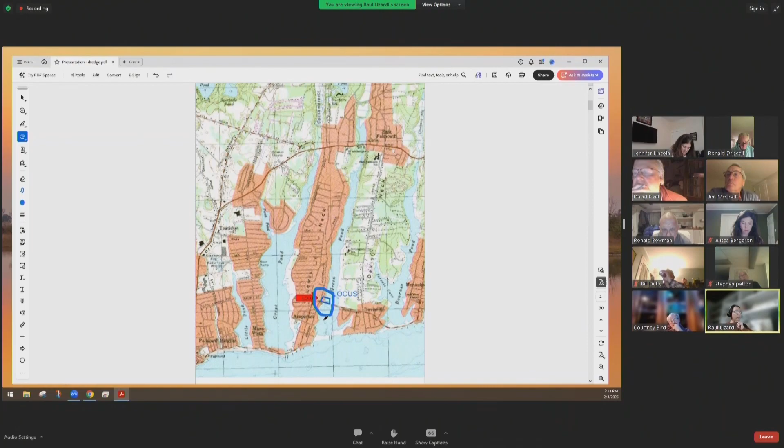I believe I skipped one of the images, but the marina eventually expanded to the configuration that is there today, which has the original line of floats and then an additional L-shape that was added sometime in the 1980s. That constitutes the current marina.

What has happened on the site is that currently there's a lot of accumulation of sediments within this area. From this point in this direction is where the Menauhant Bridge exists. So there's been a lot of accumulation of sediments in this little corner, this triangle piece. And then at low tide, the boats within this section of the marina are bottoming out and causing problems.

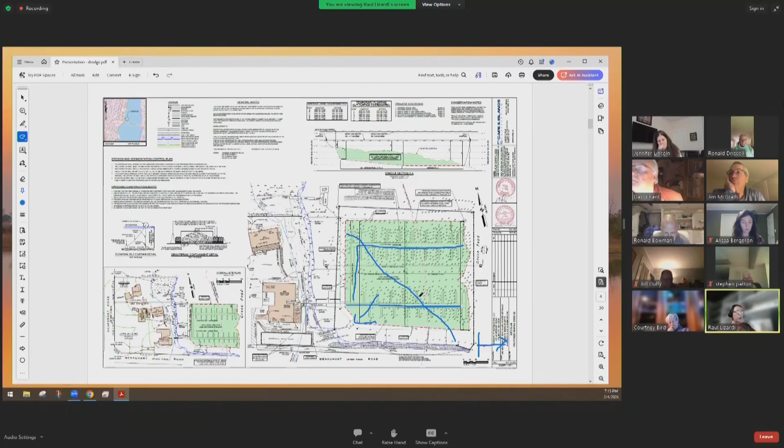The site has been under new ownership since the end of 2024. The current owners have not done any changes to this marina. What we're looking to do is get permission to dredge the site.

This section of the marina we're calling to be dredged down to elevation -4, measured from mean low water. Then this section we're proposing to dredge to -3. So there will be a transition point somewhere in the middle, between elevation 3 and elevation 4.

The intent is to get adequate water depths to use the marina properly and not cause too much problem, both for the boaters and the marina, but also for the environment. Right now, during low water levels, if anybody tries to boat out of here, there's a lot of suspension of sediments, and it's detrimental for the environment and the shoreline system at this location.

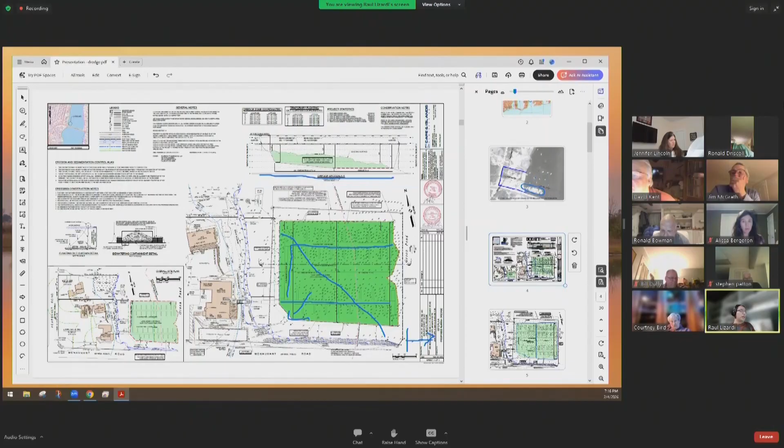On average, looking at the cross section we have on the plan—the cross section has an exaggerated vertical scale, really 10 times the design—it averages roughly 1.5 feet of dredging within this footprint. So it's not a massive dredge project, but it does cover quite an extensive area: 35,200 plus square feet.

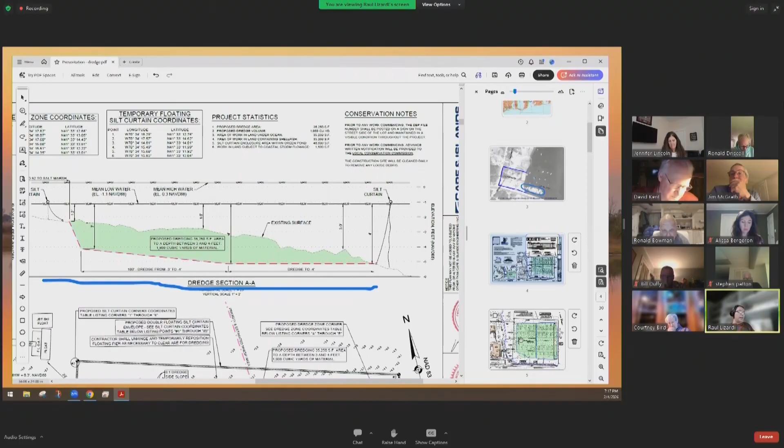The total volume of dredge material is roughly 1,900 cubic yards. The intent is to dredge the material and dewater on site. If I zoom back to my plan, there is an existing boat ramp at this location.

What we propose to do is, on the upper side of that boat ramp, install a dewatering basin. The material gets dropped into that dewatering basin. Once dewatering has happened, trucks will be delivering that material off to an off-site destination for disposal.

We believe the final disposal is going to be the Bourne transfer station. Once all of the dredging is done, all the temporary sediment controls will be removed, along with the temporary dewatering basin.

For protection during construction, what we propose is a silt curtain that completely encompasses the dredge area.

We did receive comments from DMF, and we received comments from Natural Heritage. The site, from this point towards the pond, is partially within estimated habitat. Natural Heritage's determination says that this project does not constitute a prohibited take of habitat.

The DMF letter does recommend a time of year restriction, which is typical for these dredge projects. We also received comments from the harbor master stating that this project does not result in impediments to navigation or hazards to navigation. We did also receive comments from the town's shellfish constable.

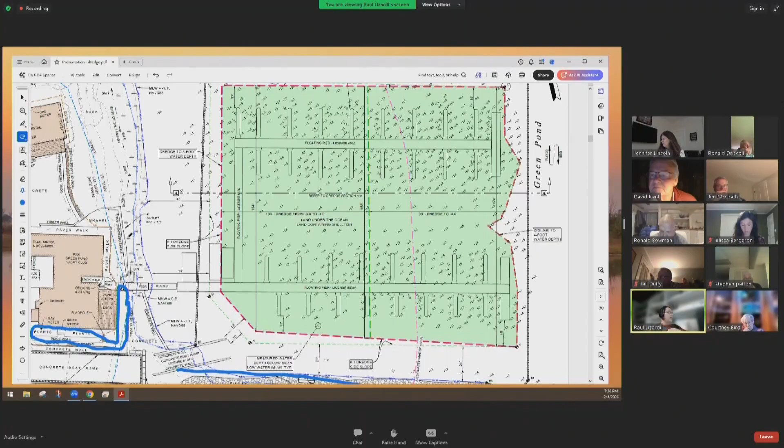There was a specific permit referenced in the comments from staff, including some past drawings or approved plans related to it. I went back to that permit, which approved mitigation in this area. Based on what I found, a compliance was issued in 2008 or 2007, and all the plans were proposed at this location, dating back to a plan I believe from 2002. There was an older plan from 2000 showing additional plantings at this location, but that wasn't the plan referenced in the order or the compliance. The only plans called out were in this location. But nevertheless, if there are plantings required for mitigation in these locations, those plantings should be there, and if not, they can be restored.

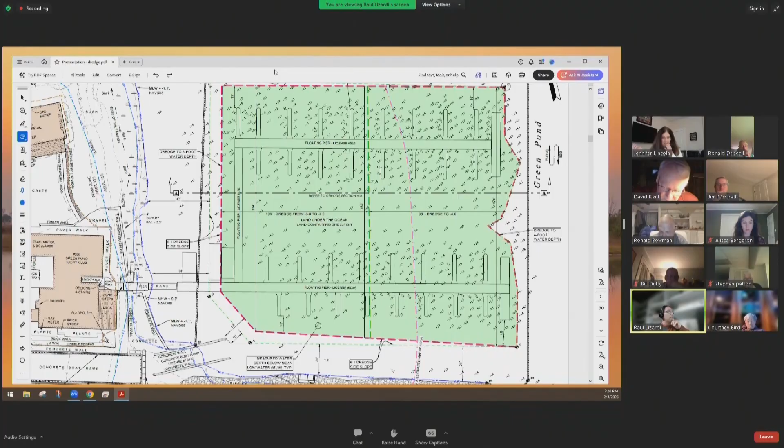Can you put your comments regarding 10.25 in writing, Raul? I know you mentioned it was in the notice, but all five were discussed in half a sentence, so if you could expand on that, that would be great. I agree with your analysis there. I need it for the record, and a little something more substantial than what was submitted. We'll condition the replanting of that bank. It does need to be done.

Alyssa, when you were talking about the terminal floats, I thought you were talking about the interior ones, not the ones Raul was mentioning. Can you clarify? It was those ones, yeah. Per the plan referenced in the license, that's what I found.

I do know there were, I think you referenced notifications, Raul. I don't know if that was at the Chapter 91 level. I couldn't find anything at the local level, but we could be missing it. So if you could send that over, that would be helpful. Maybe we can all put the pieces together.

And then, Raul, I do have a couple of questions on your dewatering now. I've been thinking about it. The dewatering area is not very large, and you're dewatering 1,900 cubic yards. How long is that going to take you?

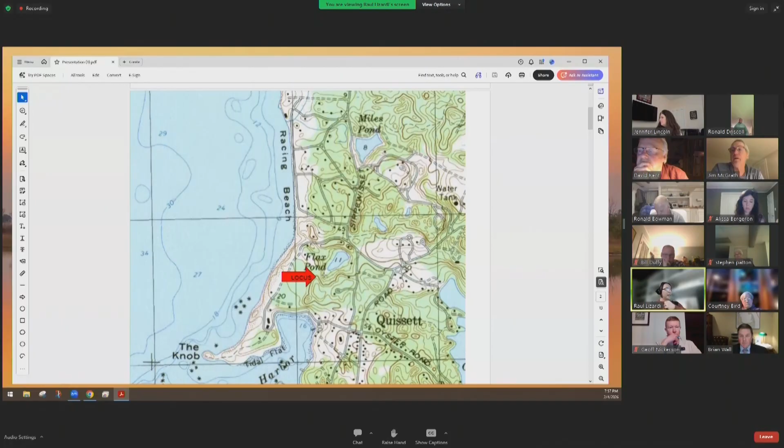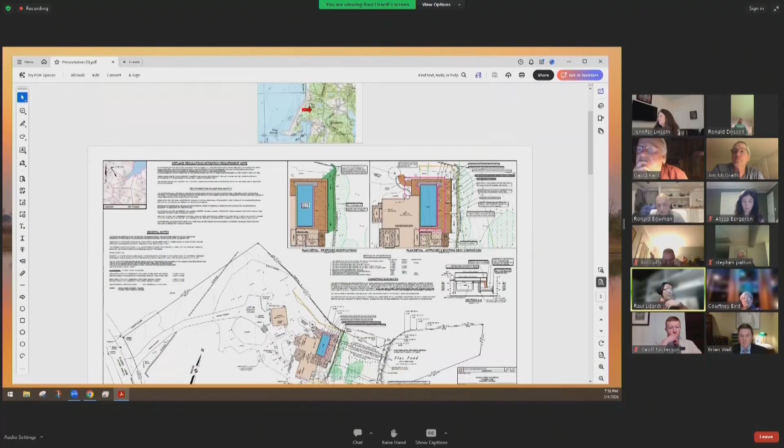The property abuts Flax Pond. There's a couple of Flax Ponds in Falmouth, so this is the little Flax Pond in Quissett. This is the application drawings that were filed with this application. This same plan was submitted last year, probably now 2 years ago, or a little more than a year ago, with the attempt of amending the active order of conditions that permitted the original project.

What we're doing with this notice of intent filing is to present the project again to this commission and present it as a project that could be approved under the regulation while still protecting the wetland resources and the buffer zone A. The wetlands, like I mentioned, there is Flax Pond, which is the little pond at the back. A portion of the pond is part of the property.

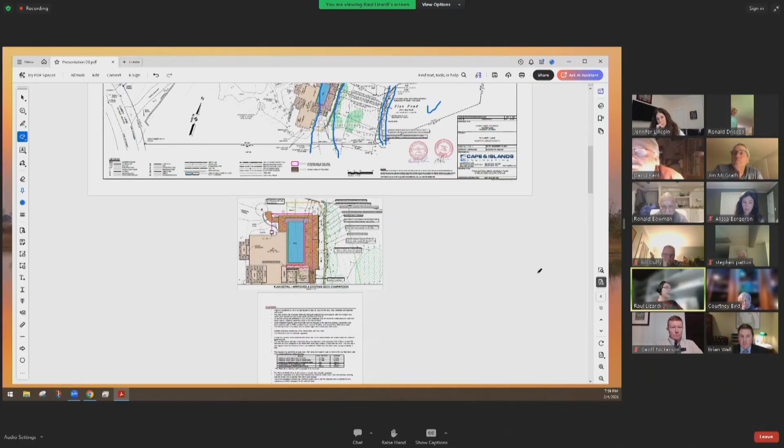There's an inland bank associated with Flax Pond, and a little bordering fringe of BVW. Then there's buffer zone A and buffer zone B associated with these resources. The most restrictive, buffer zone A, is the 75-foot setback from the inland bank. Then there's buffer zone B, associated with the combination of the inland bank and BVW, which is 100 feet away from those resources. The whole project was permitted in—if I go to this other drawing—for some reason my drawing isn't zooming up to the level that I want it.

So the original order condition approved this pink line that I just colored in blue. What was as-built in 2023 and 2024 was this deck. A couple of things were different from the approved drawings to what is as-built and what exists on the site today.

There's a 5-foot bump out of the deck, and underneath this deck there is a masonry retaining wall that is different by 5 feet location-wise from what was approved. There is also an accessible ADA ramp system at this location, which falls within the previously existing deck footprint. This location of the ramp is an additional bump out not shown in past permit drawings.

The whole project was approved and designed originally so that we did not disturb the A zone, which is at this location. We had a limit of work even further inland from that A zone, and we had a 10-foot original setback. The existing condition is that the deck at the closest point is roughly 5.9 feet from buffer zone A.

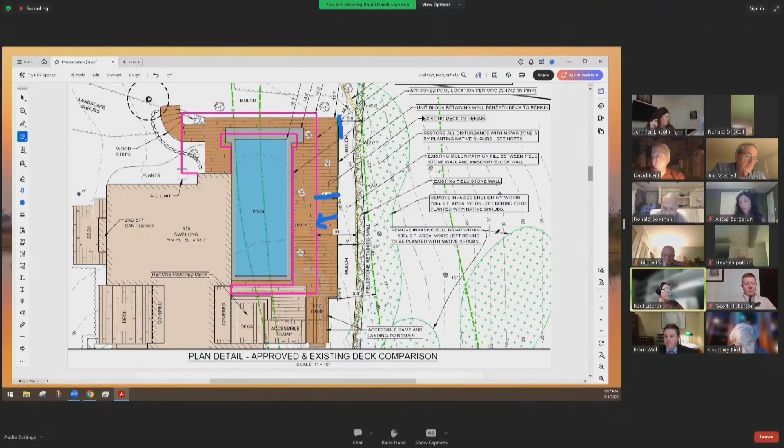If I can pan over to a couple of images. This is an image of what the site looked like on the back of the property before any construction. You can see there were some fieldstone walls at the site already in place. Those fieldstone walls were removed. There was a stone patio with some landscape, hardscape features. Those were removed. This is another view of the site before construction.

There were fieldstone walls at the site. Again, the same idea, there were fieldstone walls. Even down the bank, there were some placement of stones down the top side of the slope towards the pond. All of that got disturbed when the pool was constructed.

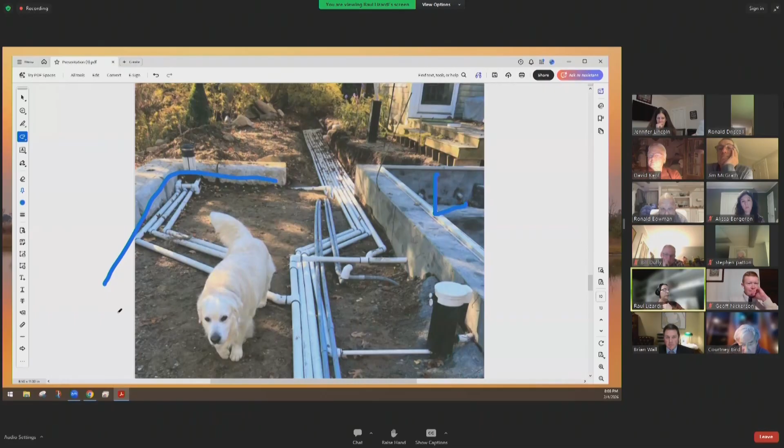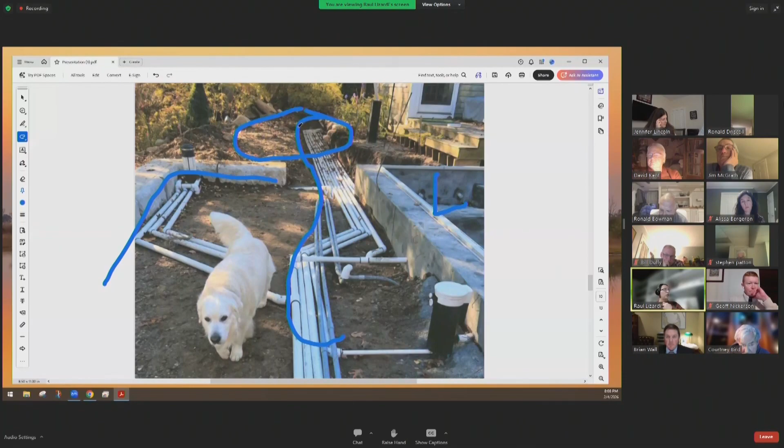These are some photographs of the construction of the pool. The pool is at this location, the masonry walls at this location. This conduit system is the one that feeds and purifies the water for the pool. This is the area that used to have a stone patio and a couple of the fieldstone walls that were removed.

This is another view in a different direction of the same activity during construction. And this is what exists on the site today. This is a portion of the ADA ramp that was constructed. All of this is more than 10 feet away from buffer zone A. This right here corresponds to about the 5-foot extension of the deck, and this below is the masonry retaining wall.

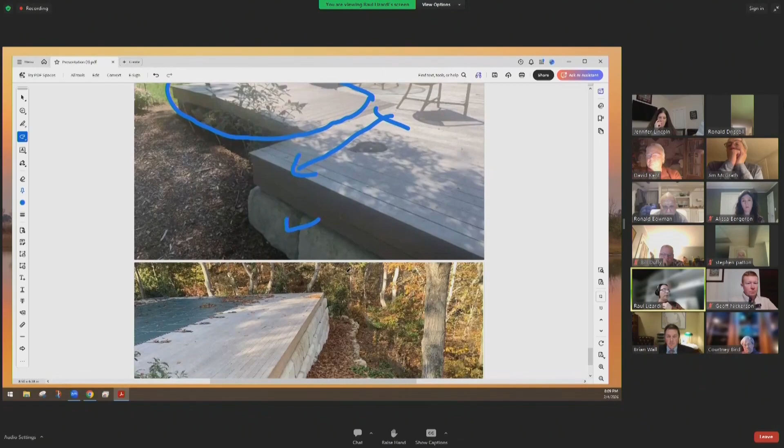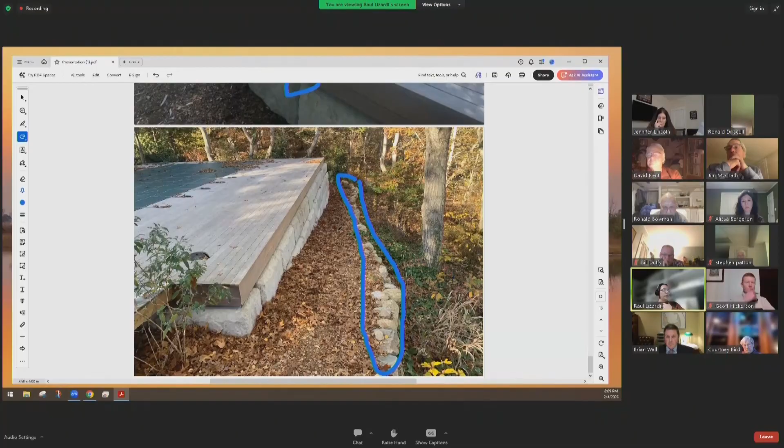This right here is the additional fieldstone wall that was constructed. We propose for this fieldstone wall to be removed. The fill between that wall and the masonry wall will be removed, and this area will be restored with native plantings. In this picture you can see some of the English ivy that is still persistent on the site, even crawling up some of the trees.

So that's the project. We believe this is a better project than trying to completely demolish the site and reconstruct this pool and pool retaining wall. The area between this wall and the pool wall is actually structural fill, so we cannot remove this wall and keep the pool at the same time because that structural fill is essential for the stability of the pool.

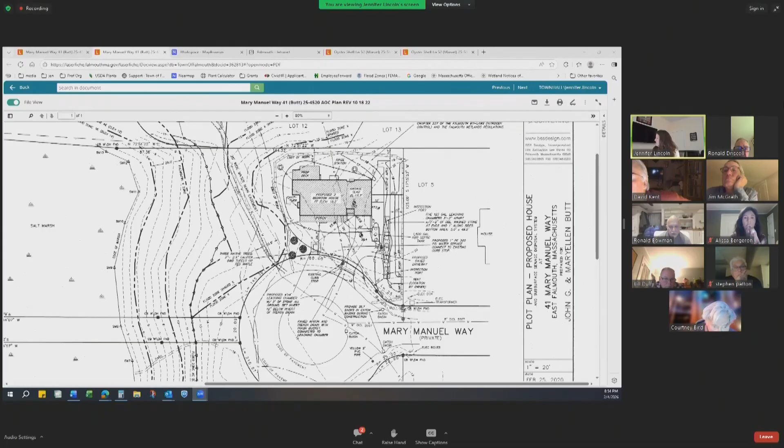So what I'm going to do is share my plan real quick with the board. So the board sees the plan, correct? Yep. Okay. If you follow my cursor right here, this is a Zone A buffer zone right there. Oh, wait, where is it? Right here. Oh, I wish I could draw on it. Probably could. Right there's a zone A buffer. There's your limit of work.

Now I'm going to show you an aerial of when the house was being constructed and one from September. This is a Nearmap photo of April 8th of 2023 when the house was under construction. This is the limit of work that was set up at that time.

I'm now going to toggle over to September 11th of 2025. And as you can see, I mean, the houses aren't lined up perfectly, they're aerials, but as you can see, where this line was your zone A. So all of this area in your zone A buffer, plus over in here, has been altered.

I do think it's important that the board have an updated site plan so that we determine the square footage that was disturbed, what we need to replant, and there were several large trees down by the salt marsh over in this area that were dropped and just left right in the zone A buffer of the salt marsh. We have photos of them.